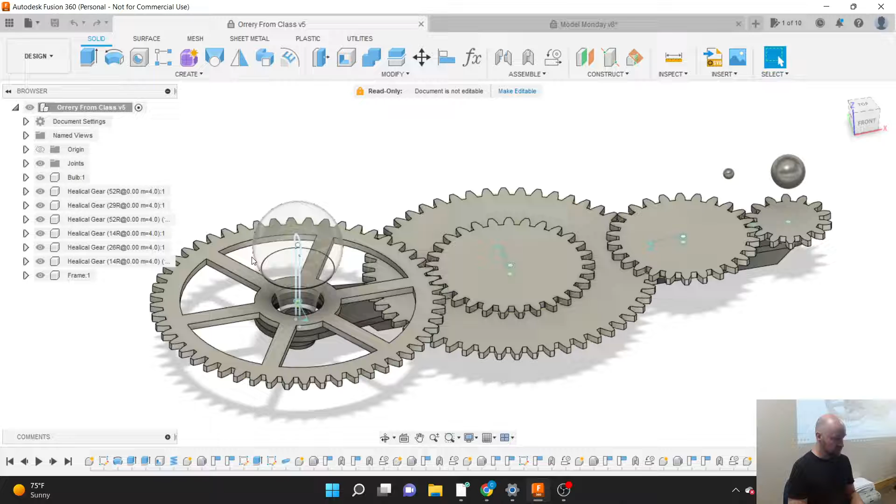So we are going to start by creating a new component. So up in the Create menu, I'm going to go ahead and find the New Component option there. So a component, as you may know, is a collection of sketches and bodies and construction planes, all housed in kind of a neat little folder or component, as we know in Fusion. And we're going to call this our base, because it is all about the base. All right, so I'm making a new component.

My active component is my main document component. So that means when I make this new component, it's going to make this inside of my main document component. You can see I can spin this little triangle here on my browser and hide or show all my components that are inside my main document component there. And I'm just going to go ahead and say OK.

So everything ghosted out. Everything became mostly transparent. And that's because it only shows us the things that are in our active component. So this little radio button here next to our component that we just made lets us know that this is our active component and nothing exists inside of it right now. It is totally blank. So inside of this component, we're going to create a sketch.

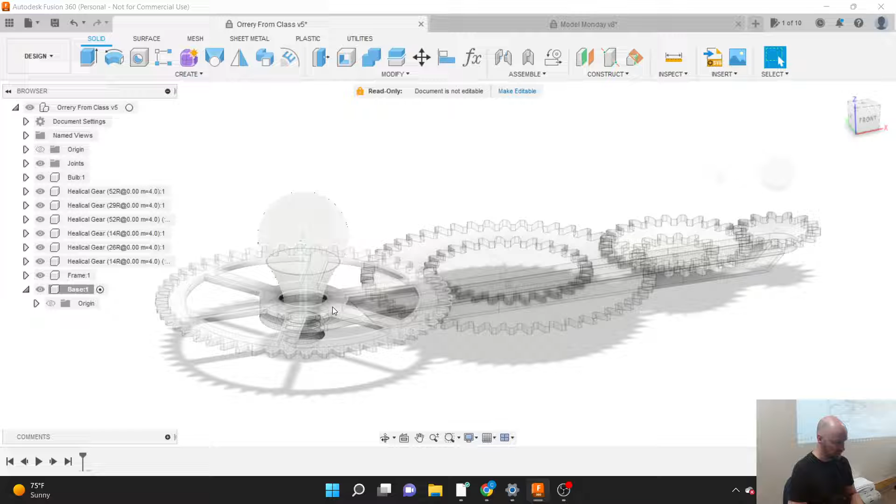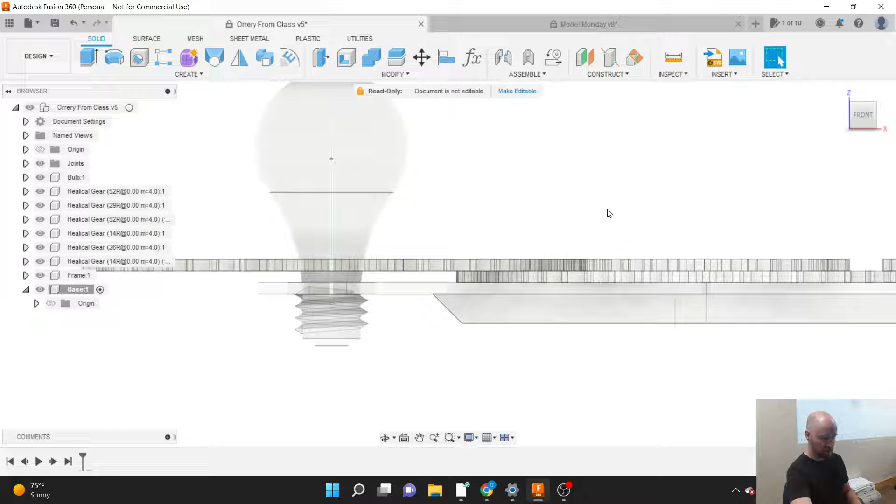I am going to choose to make this sketch on an existing plane here, on a surface that we already have in our model. I think that's how I'm going to do this. I'm just letting my brain think for a minute, because, yeah, I'm actually going to make it on top of the gear. That's the way this goes.

Okay, so from the Create menu, I'm going to go ahead and choose the Create Sketch icon here. So in general, we start by making two-dimensional sketches, and then we make those two-dimensional sketches three-dimensional. The first thing that we're going to do here when we're making a sketch is we've got these three surfaces that it encourages us to create that sketch on. So we've got to start with a two-dimensional surface, or tell our three-dimensional drawing environment where you're going to draw that two-dimensional sketch. Kane, for you, you can pick any one of these three surfaces. That will totally be fine.

But for the rest of us, we want to draw on the top surface of our innermost gear, that 52-tooth gear that is surrounding our light bulb. And my trick is I just kind of hover around the model. Everything is kind of ghosted out, but if you hover over the right spots, you can tell what surface you're highlighting. Because in addition to those three drawing surfaces, you can create a sketch on any flat surface.

So I'm going to pick the top of this gear as my drawing surface, and I'll just spin around to look right down at that. Yeah, indeed, I'm on the top. And thankfully, it put the origin right at the middle of my gear here.

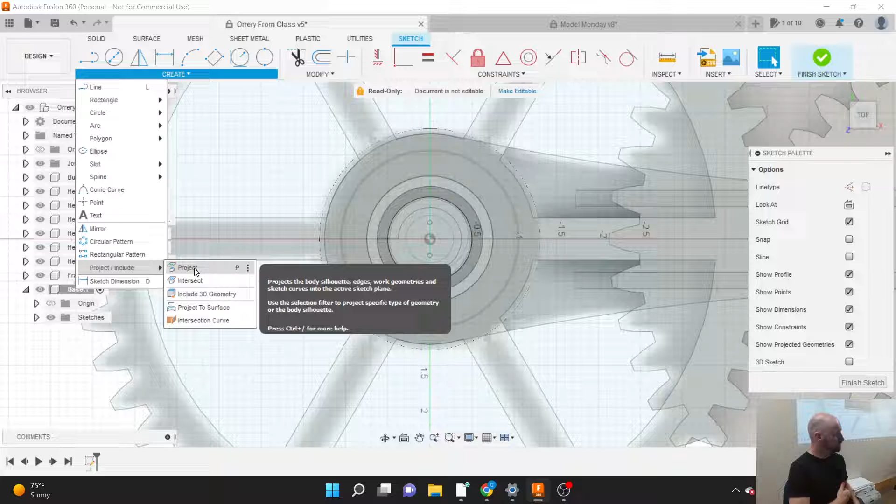All right. So we're going to project over just any one of these circles that I can get to highlight that is concentric. So we have a lot of concentric circles here, from our light bulb to our 52-tooth gear to the frame underneath it. I just need one of those circles to project over, and then I'm going to go ahead and say OK.

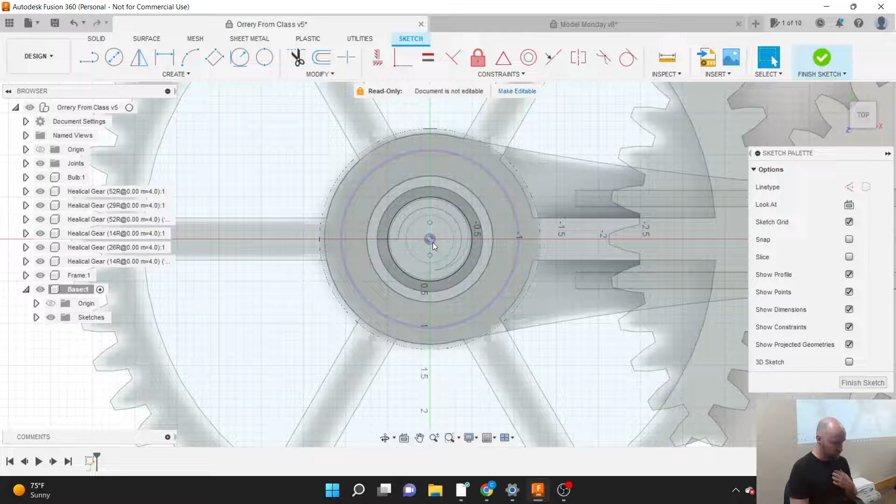So now I know I have a center point there that I can use as a common point here, because now I'm going to make a circle. So from our Create menu, I'm going to go ahead and choose the circle option, and then the center diameter circle option.

And I'm going to choose to make a center diameter circle of a size that I totally remember, because I was not frantically building an airplane just before class today. I want to say this is two.

Would you like a digital caliper? Yeah, if you have, or that'll work too. That'll work just fine. Yeah, thank you. This will be just fine.

Yes, it is 1 7/8. And that sounds right. As you may know here in Fusion, you can type in measurements in a lot of different ways. So if I want to type in 1 7/8 of an inch, I can do that. I can also type in 1.875, which is 1 7/8, I believe. And that is a totally fine way to do that as well. So 1 7/8 is the second circle that we're going to make.

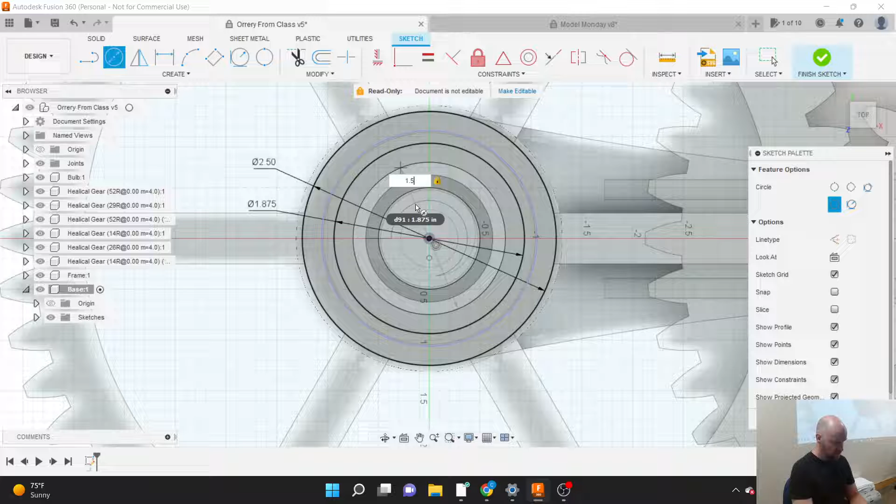And then the last circle that we are going to make is going to be the smallest circle, and that is 1.5 inches. So we're going to make one last circle, also concentric with the other 2 circles. That is 1.5 inches. And I'm just going to neaten up my measurements here.

People know I like to try to keep my drawings organized. We've been doing a pretty good job of organization here with this project, so try to keep up that winning streak. All right, cool. So now I'm going to go ahead and say finish sketch.

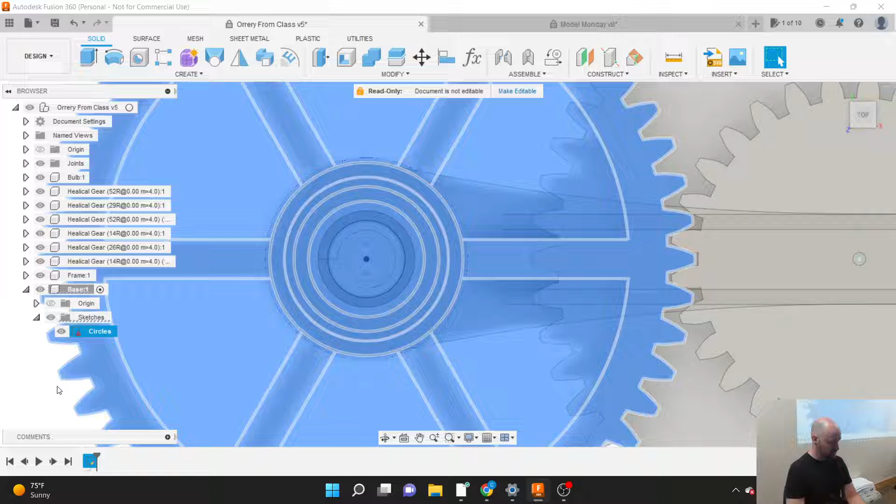So now we've got a sketches folder here inside of our base component. And if I turn the little triangle next to that sketches folder, there's a sketch here that I can name. So I'm just going to click one time, pause, and then click a second time. And now I can rename that to circles, or base, or profile. There's probably any number of names that you could go with, but anything is better than sketch 1. I think it's also going to be the only sketch we need to make for this, which is convenient.

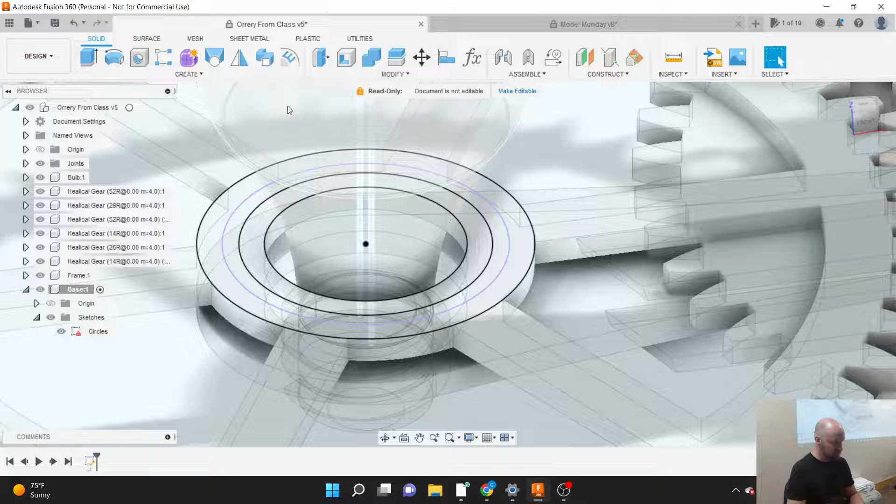All right, so now we can extrude some bits. So let's go ahead and start by extruding. I clicked finish sketch, and I'm going to come up to my create menu, and I'm going to choose the extrude option here.

And I'm going to extrude. For me I have to click on 3 different things, but I think that's because I've got that projected circle in there. Let me just verify that one of those lines is purple. Yeah, so there I get a little purple line in there. I'm curious. I wonder if you can make a projected line into a construction line? Let's do an experiment. Look at that, you can. So that's kind of fun.

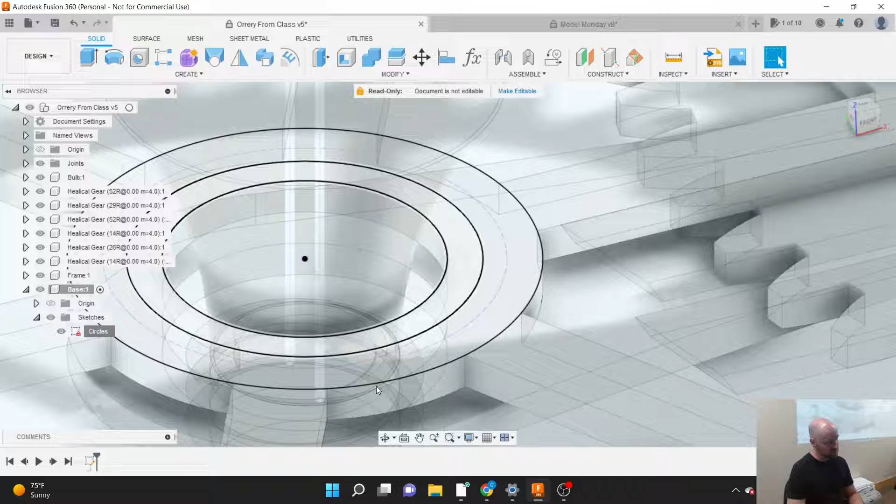So here's what I did. I guess I didn't really need to, but I had that projected circle that I had made, and a solid line. Maybe I should change it back so I can demonstrate for everybody. A solid line divides up a surface here. So this is my projected line that I just used to find the center point here of the solar system, and the center of the sun is right there.

In case you're looking for it in your flat Earth world, it's right here.

And so that projected line just divides up that, and it makes it a little bit confusing. Sometimes I'm like, oh, am I supposed to be picking this one and this one? And maybe I wouldn't get the right things to extrude because there's a lot going on there.

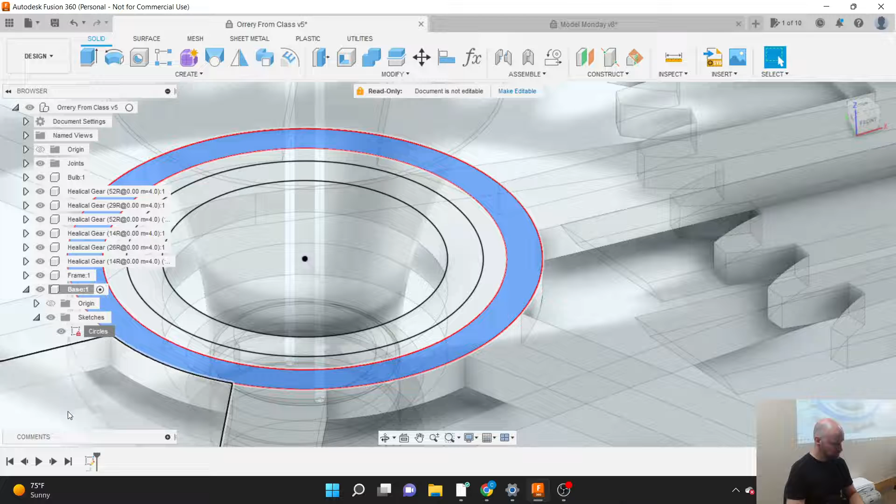But if we right click on the sketch that we just made, so either here in the sketches folder in our browser, you can right click and you can say edit sketch, or down here in our timeline, so down at the bottom of Fusion 360, we've got this kind of timeline of events, and I can right click on that sketch icon in the timeline and say edit sketch.

And now if I highlight the purple line that I'm projected over from existing geometry, and I push the construction button here in my sketch palette next to where it says line type, it'll change that line to a dashed line. So now that that line is a dashed line, if I click finish sketch,

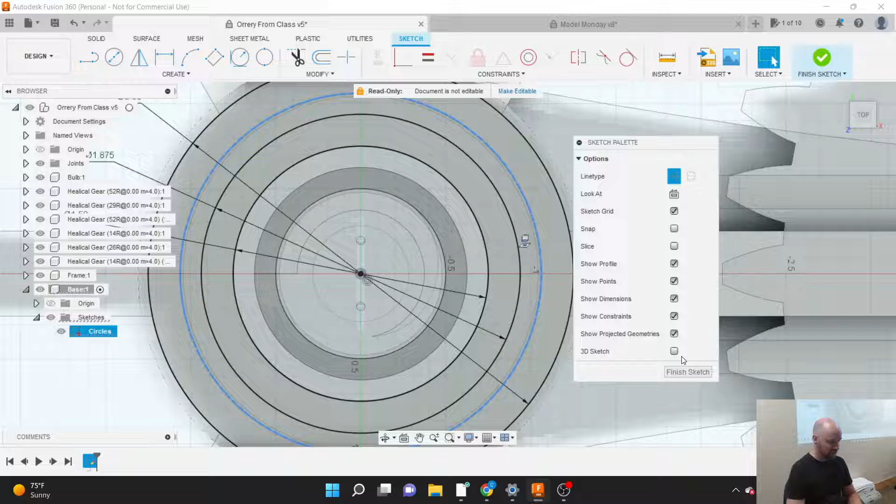now when I come to do this extrusion here, that dashed line isn't going to divide my surface up, so I won't accidentally confuse myself here about which things I need to extrude. But we do indeed want to extrude.

I digressed a little bit there, so Fusion 360 is full of tangents and lines that they are tangent to.

So we are going to extrude up that little ring. I believe it goes up 1/4 of an inch, because that's the way my brain works, is I think using the imperial measurement system, which is like the other measurement systems except worse in most ways.

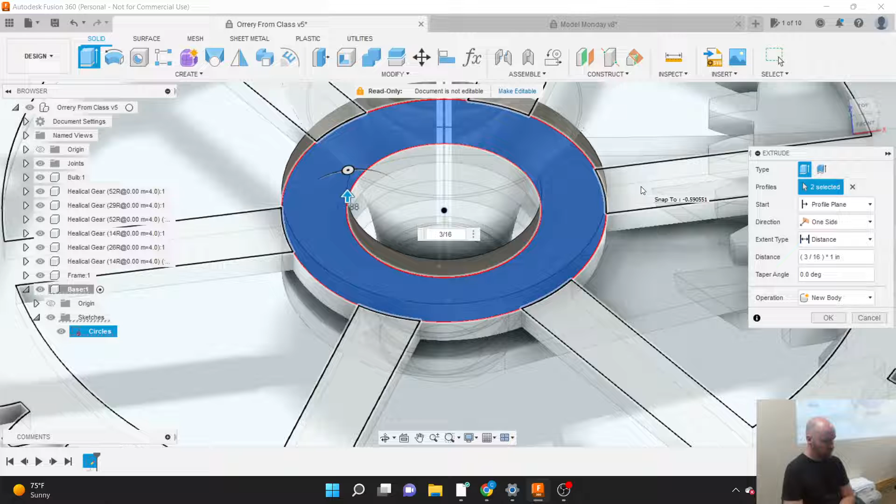Nope, I lied. It is 3/16 of an inch. Although I suppose there's no reason it couldn't be 1/4 of an inch, but why not make it the exact same as the one I have? Not 3/32, 3/16. So 3/16 of an inch is our distance.

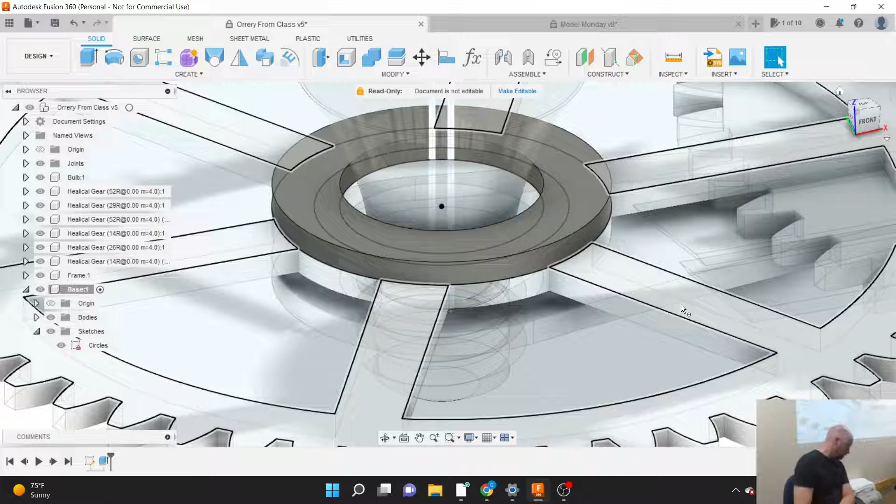We're making a new body here, and I'm extruding this up. So I'm going up away from the surface of my gear here. And I'm going to say okay. All right, now I want to do another extrusion here.

I want to extrude out just the intersection of those concentric circles that I made. But right now it's difficult for me to do this because there's a lot of other existing geometry that's just kind of in the way. It's kind of hard for me to highlight the circle that I need to.

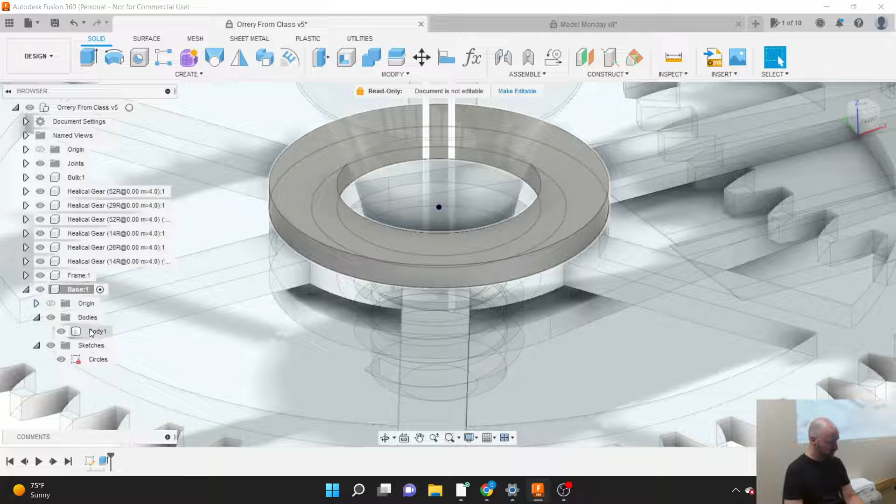So what I'm going to do is first I'll spin down the triangle next to my bodies folder. Now that we've created a three-dimensional object, we've got a bodies folder, we've got a body to name. This body is going to be the base. This will eventually become the base once we join things to it. So I'm just going to go ahead and name that the base.

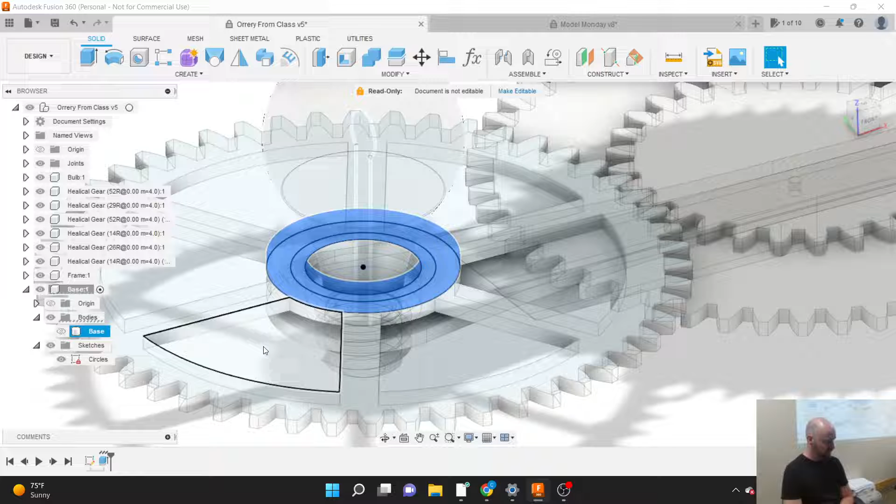And then I'm going to toggle off the visibility on that base. So once I turn off the visibility on the base, it's easier for me to highlight the sketches that kind of exist on the other side of that three-dimensional object there. And I can extrude out yet again. So from the Create menu, I'll go ahead and choose the Extrude option. I'm going to highlight that very middle circle there.

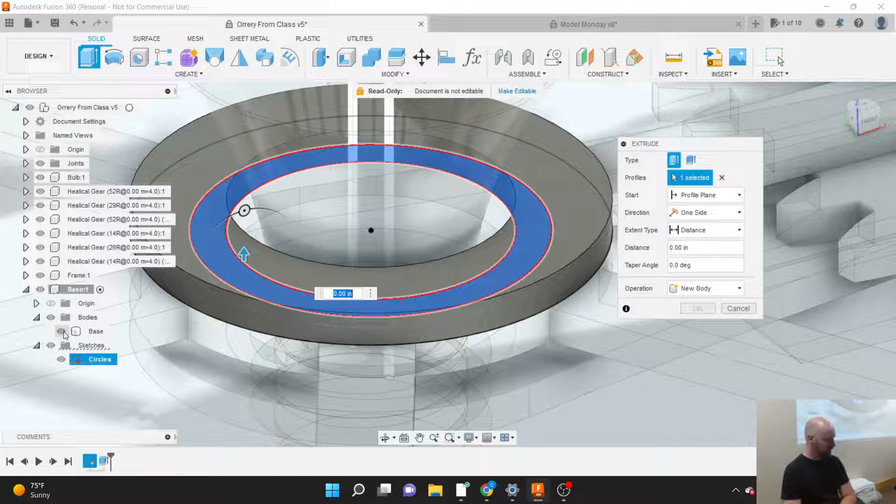Normally, or the standard way for us to extrude, and I'll tell you what, once we have the profile selected here, we can turn back on our base body if we want to. So it's just the selecting of the body that makes it difficult, and why it's handy to be able to turn off the visibility on that. But you can turn it back on afterwards. And we're going to go up a distance of 1/2 of an inch.

We're not going to do a cut operation here. The default here is changing to cut because we are extruding through an existing three-dimensional shape. So it defaults to cutting away from that existing three-dimensional shape. We actually want to join to that three-dimensional shape. So we're going to join to that ring that we made down below here.

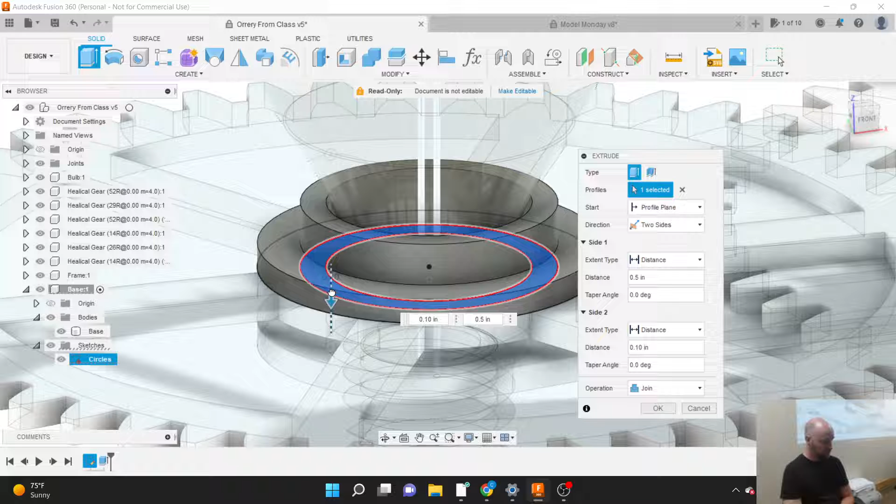And I'm going to extrude up a distance of 1/2 an inch, but I also want to extrude down a distance. So instead of my direction here in my extrude window set to one side, I'm going to change that to 2 sides. And now this number I remember because I believe it was 4 inches.

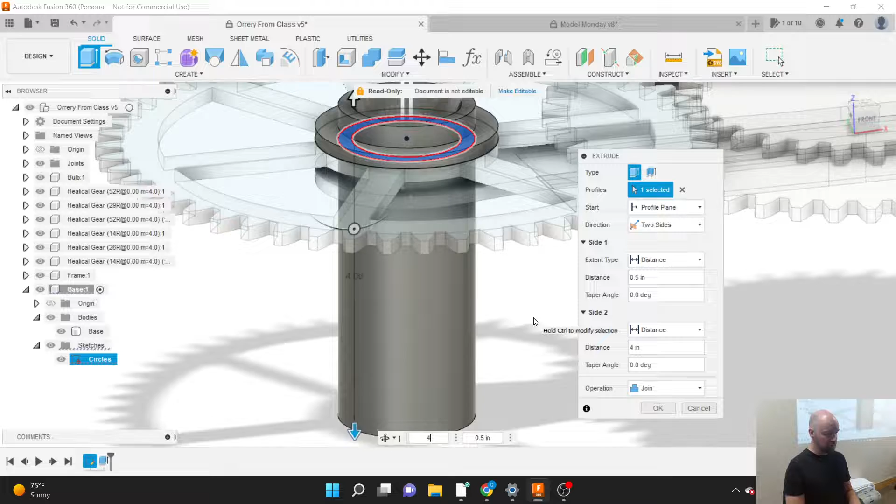Yeah, so we're going to go down from there. Yep. 4 inches. This has to be really long because the light bulb sockets that I found on Amazon just are really long. So you gotta have room for our light bulb to stick out there. So that's why this is such a long base here.

It also occurred to me that we might be able to expand this later with adding another planet around the outside at some point. So food for thought. All right, but we are joining these items together. We're making a nice long piece. We're joining it to our base, and I'm just going to go ahead and say okay.

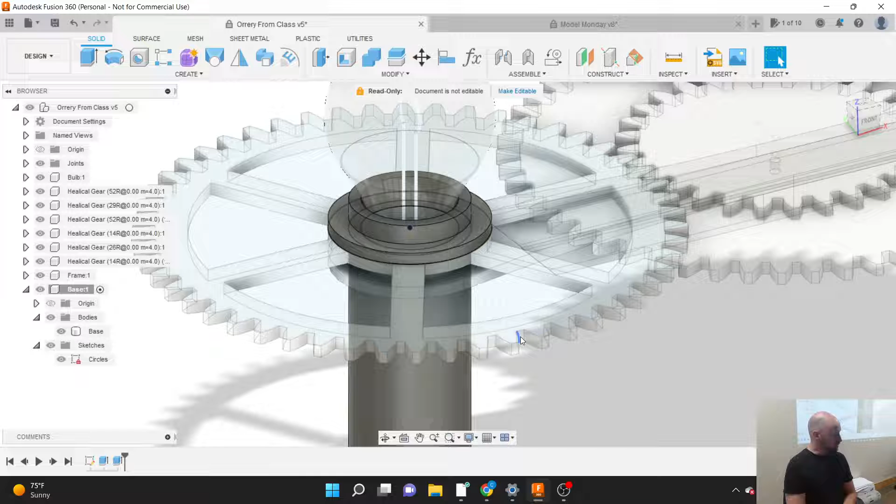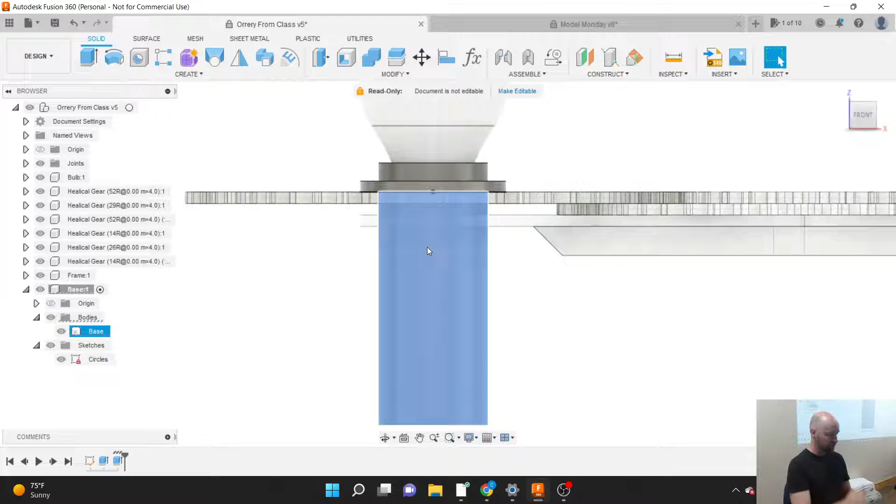So let's do one final extrusion, and that final extrusion is going to be for, for lack of a better word, the nut. So eventually, this cylinder is going to get a big, huge threaded profile on it, and then to clamp down, to hold our piece on there, we're going to have like a nut that threads all the way on there. So let's go ahead and make that nut right now.

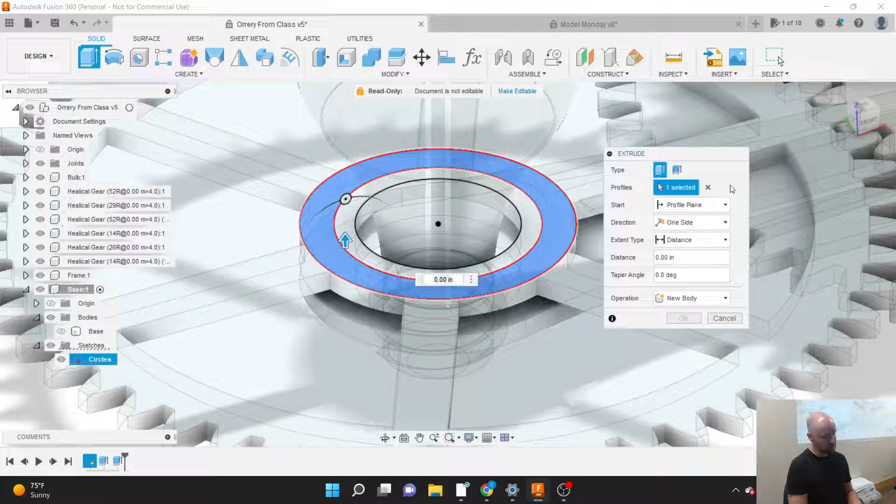I'm going to do that by turning off the visibility on my base, so it's easier for us to highlight the right sketch profile here. I'm going to go ahead and from the Create menu choose the Extrude option. And I'm going to pick the very outer ring there. Now, instead of extruding this, we're getting all sorts of tips for the Extrude menu here.

So normally when we extrude from the profile plane. So like if I go up, make it 3/16, just like the upper one. Are they the same? Close enough. Yeah. So normally it extrudes from the profile plane, right? But in this case, I want to extrude that nut and just have it live down below here. So instead of extruding from the start, that is the start of my extrusion being the profile plane, I'm going to change that to an offset.

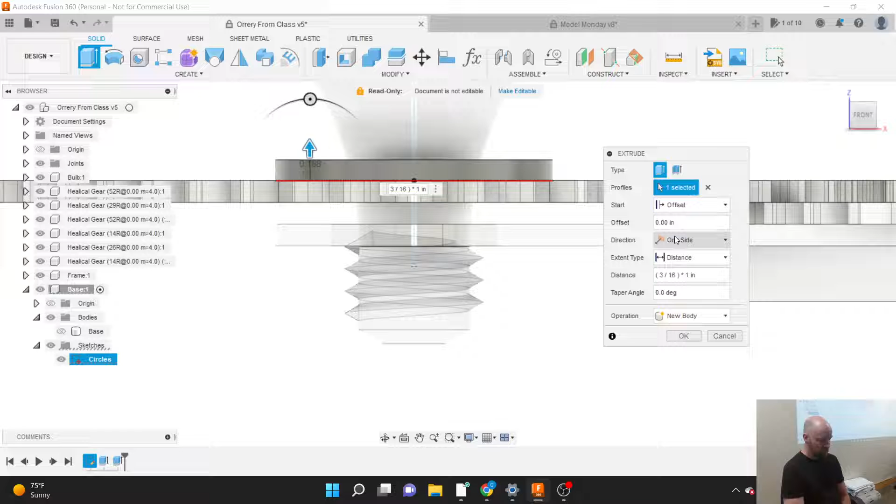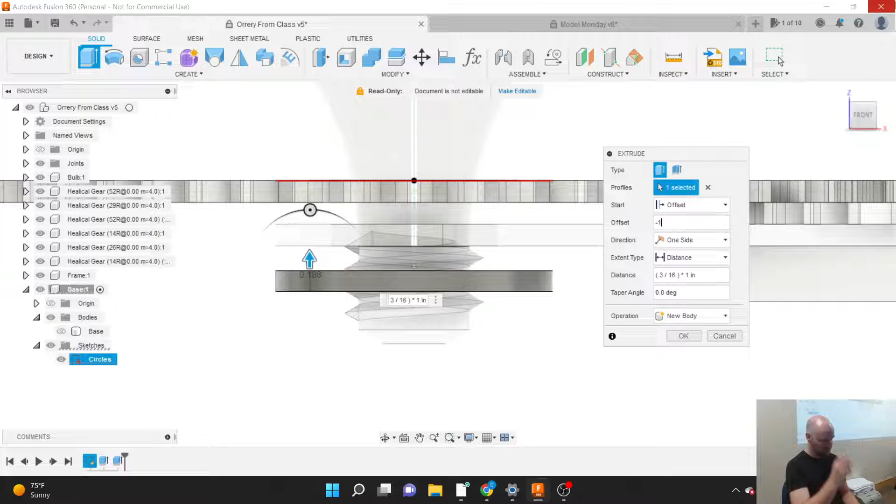And that offset, I'm just going to make like -1 inch, just so it's down there. It doesn't need to be anywhere in particular down there. When you screw it all together in meat space, it will need to be in a particular area, but it'll all be threaded and you can just put it wherever you want to. So I just want it to exist down below my gears somewhere.

I'm making this a new body, since we don't have our base turned on. Now if I turn on my base, the default will change to join, because it says, oh, this object directly touches another object, so let's go ahead and join those together for you. If you do have your base body turned on, just make sure that instead of join in the operation, you're set to new body there.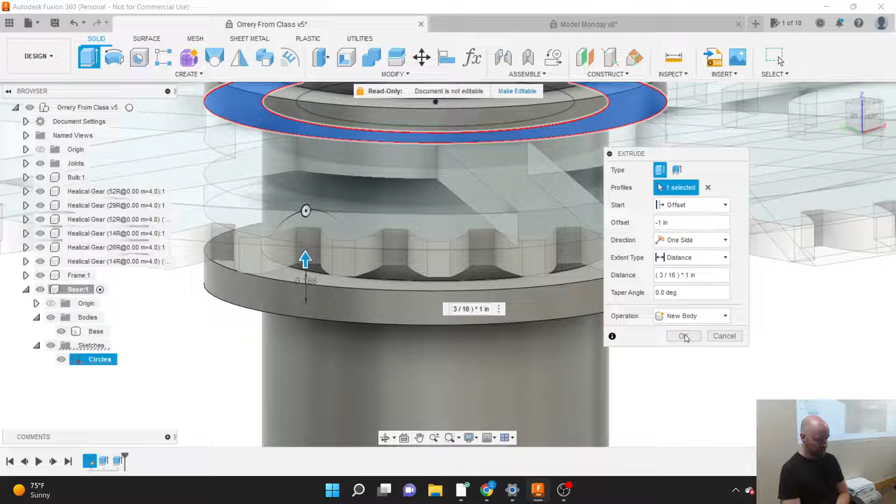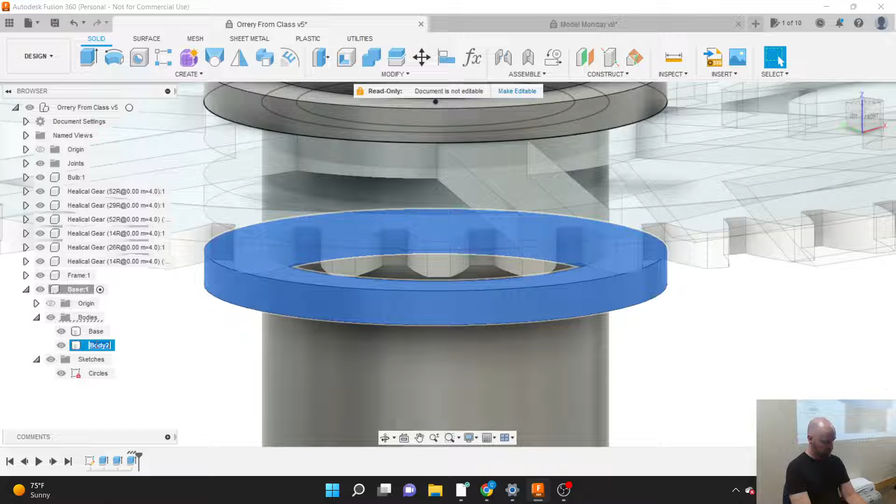Cool. And then I'm going to go ahead and click on OK. What was the amount? 3/16. 3/16. Yeah. Okay. So now I've got a body to name in my bodies folder here. I'm going to call it the nut, or screw clamp, or ring. I guess you could call it the ring also, but anything is better than Body 2.

And now I'm going to turn off my sketch just so it gets out of the way, because I actually don't think I need to use it anymore. Famous last words. Yeah, I don't think I need to use it anymore.

Cool. So the next thing, how are we doing so far? Everybody good at home? We're good here? Keeping up-ish? Yeah. Kind of following along? Okay, good. And we're good at home? Thumbs up at home? Cool, cool, cool. All right, good deal. All right.

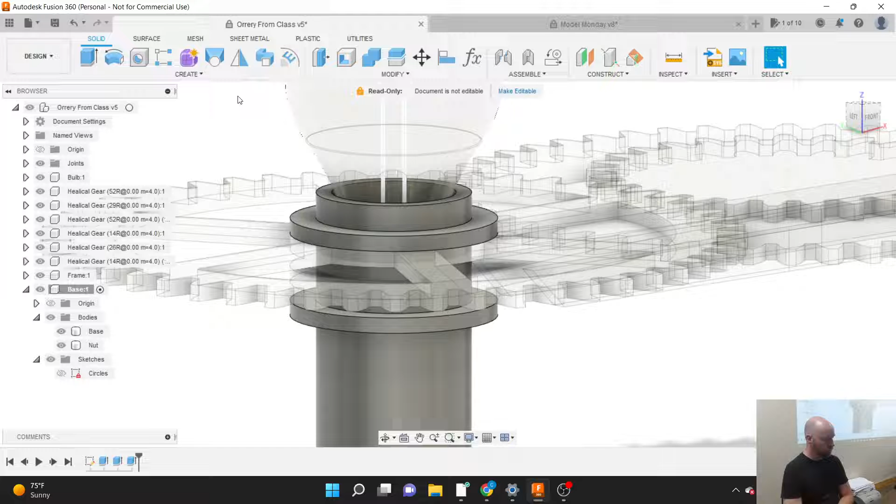So we're going to go ahead and add our threading to this big, huge structure here. From the Create menu, threads are really easy to add. So if I come up and choose Create and then the Thread option, we get our handy dandy thread window that pops up. I'm going to do something real quick. Sometimes if I mess with my settings, my contrast comes back. That might be a little better.

Alright, so I'm going to choose the face that I'm going to select here. And for me, the first face I'm going to choose is this big, huge 4-inch section there. You can see that it defaulted to a thread size, and it just made it whatever standard thread size was close-ish to the current diameter of that cylinder. And 1 7/8 is a fine thread size for us.

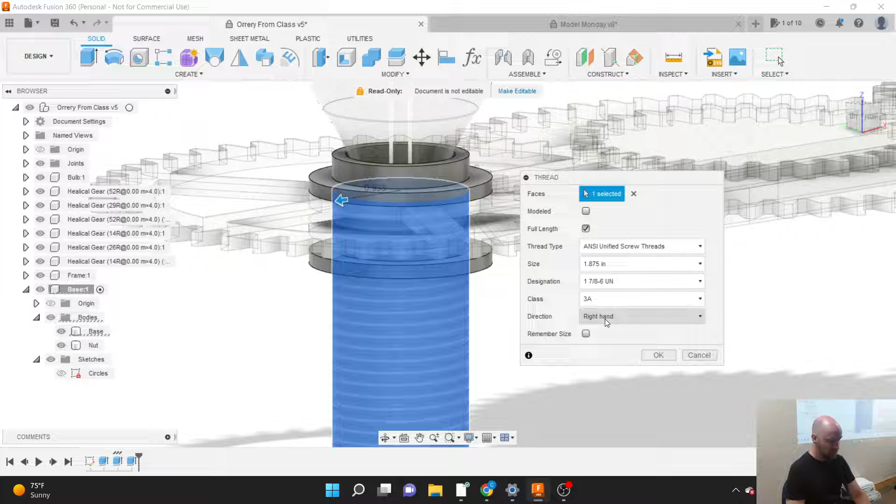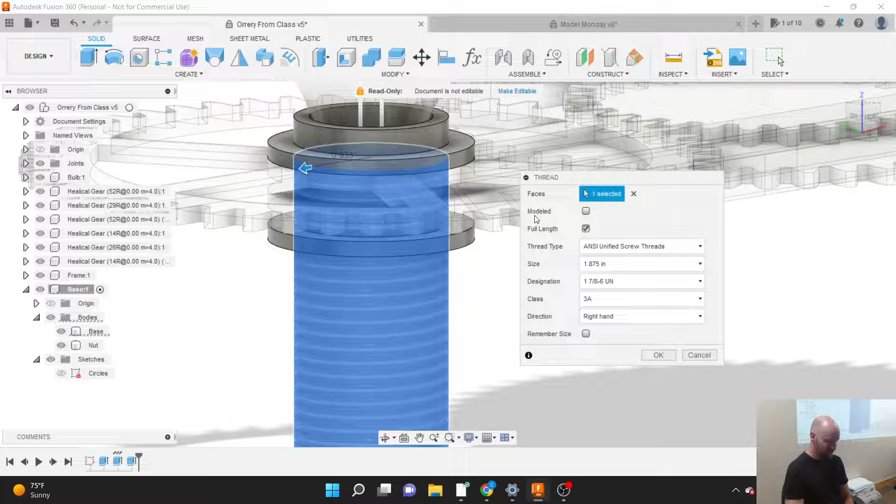It will be phenomenally adequate. But we do want to make sure we hit the little modeled checkbox. That checkbox is what allows it to be printed when we go and print this. If it's not checked, it's just kind of like the impression of a thread. It's not actually a three-dimensional thread that's in there.

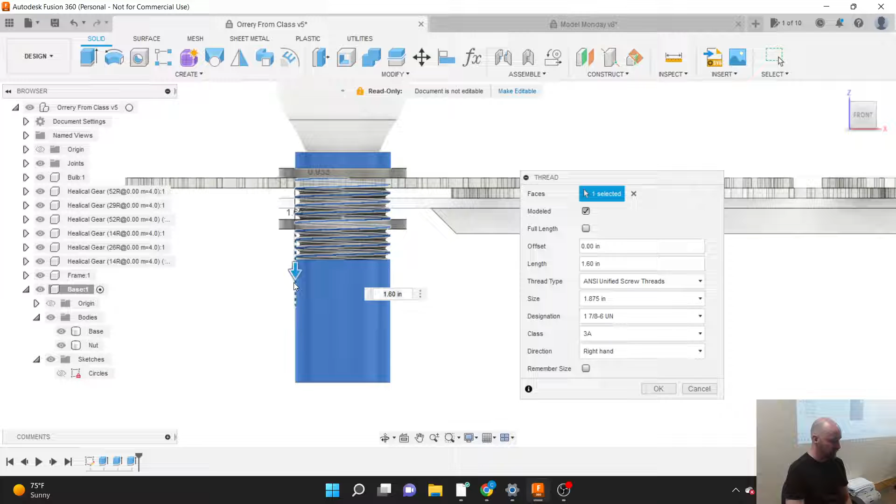We don't need to make this a full length thread. So the little checkbox that says full length here, I'm going to uncheck that. And now we have a whole bunch of arrows here. We've got 2 arrows that move up and down. So one is the location of the bottom of the thread. Now the bottom of the thread needs to go all the way to the bottom, because we need to be able to get our nut on from the bottom.

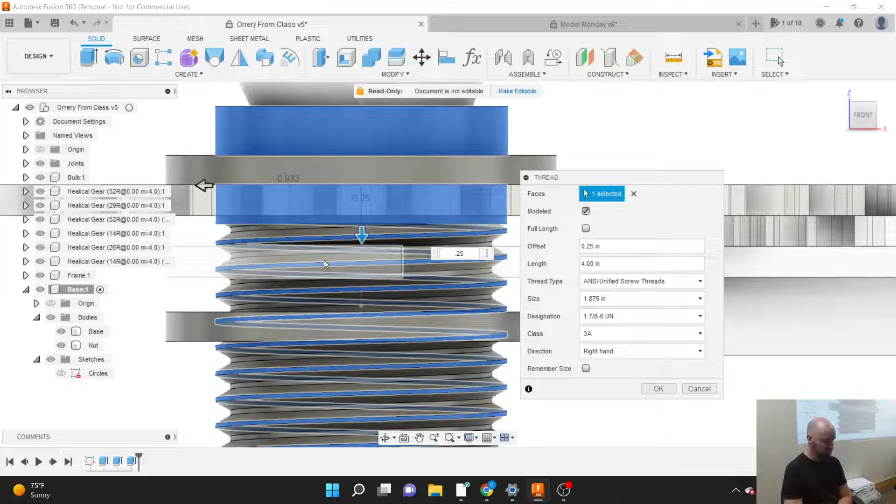However, the top of the thread doesn't need to go all the way to the top. So we can have like a 1/4 of an inch gap or so at the top of our piece, and that'll ensure that, actually it should be slightly more than a 1/4 of an inch. It should probably be more like 3/8. That when our gear and frame are rotating around here, it's got a nice surface to rotate on.

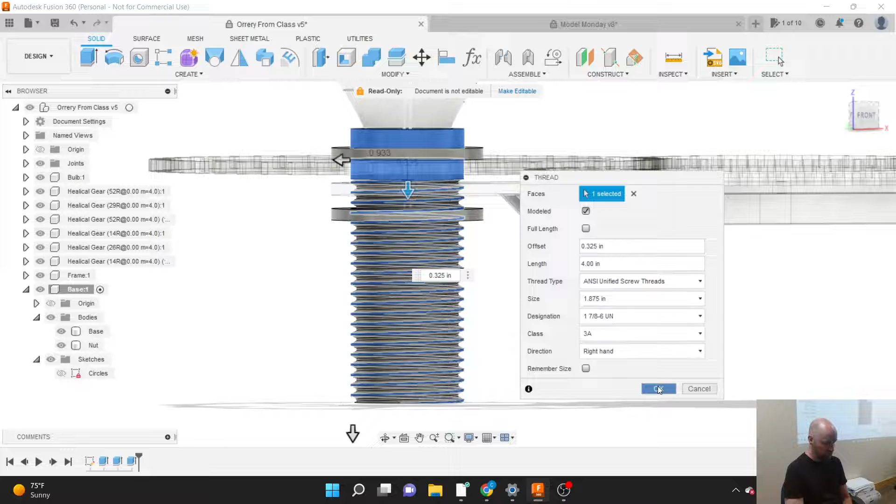You probably don't want it rotating directly on the threads, because they may not be perfectly concentric over the space of just a 1/4 of an inch. So I gave it a little flange there, I guess you could say, at the top, or a shoulder to rest on there. So 0.325 of an inch from the top goes all the way to the bottom. It's a 1 7/8 inch thread, and I'm going to go ahead and say OK. All right, that looks wonderful.

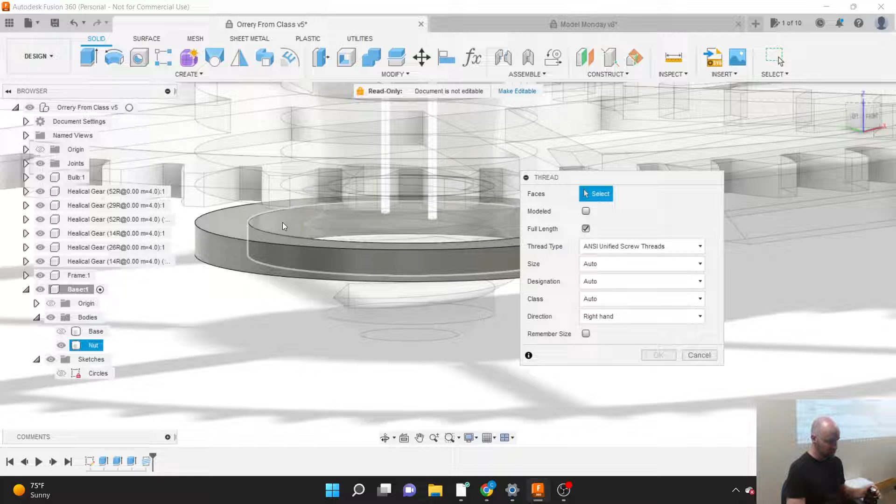Now we just need to thread our nut. So I'm going to do it the exact same way, except this time I'm going to turn off the visibility on my base body. So if I turn off the little eyeball next to my base body there, now it's easy for me to see that surface on the inside. So when I come up to my Create menu here, I can choose the thread option. And I can choose as the face that I'm going to thread that inner face from what I called my nut, could be called your ring.

I'm going to turn on the little modeled checkbox, and usually it defaults to whatever the last size you used was, but it's always a good idea to keep an eye on this thread size, like, oh, 1 7/8, that's definitely what I was going with before. Well, here there's a remember size checkbox. That's kind of interesting. I've never actually used that before, I'm not sure what that does. Use at your own risk. Remembering the size sounds like a good thing. Sometimes Fusion has really great tooltips if I just hover my mouse over something, but not in this case. Alright, so I'm going to click on OK.

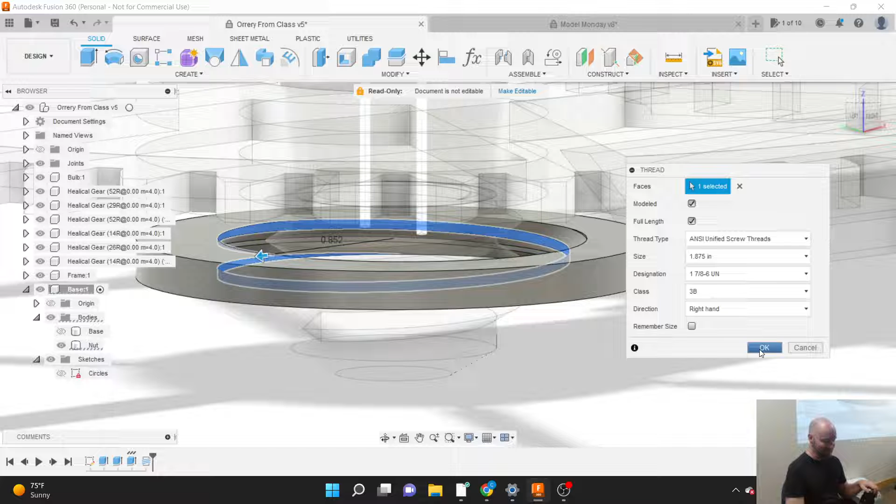Now we've got 2 threaded objects here. However, from experience, and Mike, you probably know this experience too, when you 3D print an object that needs to thread into another object, you need a little bit of,

you gotta have a little room for Jesus in there. So you slip your phone book in there and keep the kids from dancing too close together.

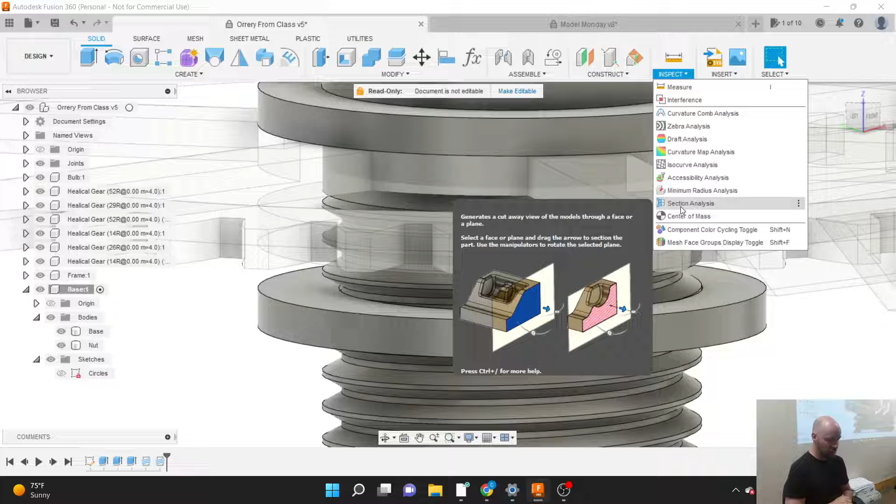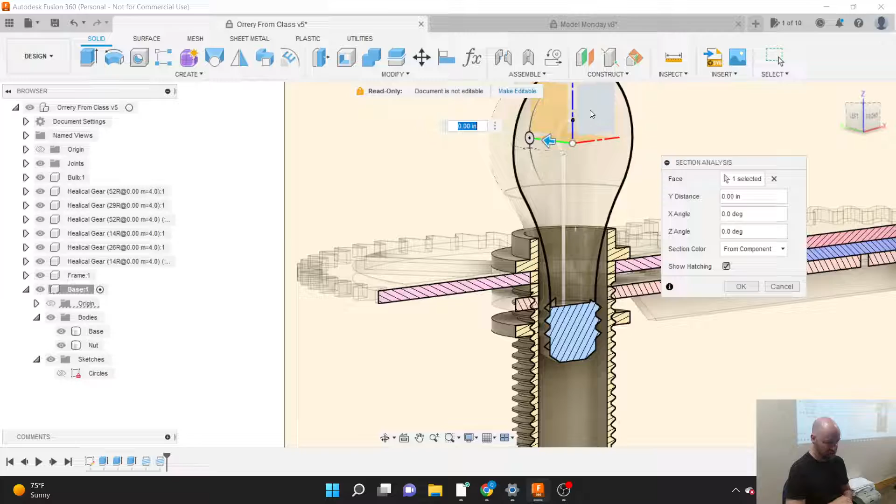But we're just gonna use the press-pull command instead. So let's see if we can illustrate this first. From our Inspect menu, choose this option called section analysis. What this section analysis tool will allow us to do is to choose a surface. So I'm going to pick one of these vertical surfaces that'll split my cylinder in half. It says, pick a face. So if I choose that face right there, you can see that it's given us a cut in half view of our model here, right? So I'm going to say OK.

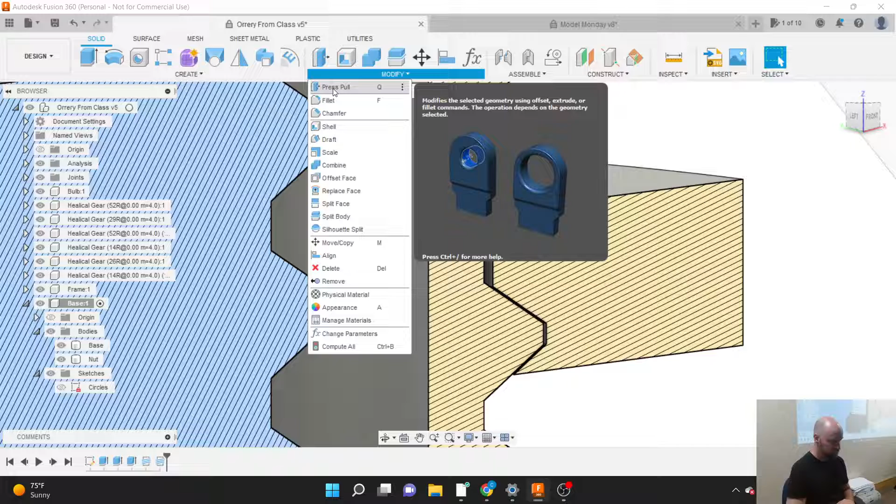And I'm going to zoom in here, and you can see there's not a whole lot of space in there for those threads. There's not a lot of tolerance in there. You need a little bit more tolerance in a 3D printed thread than you would a machined one. So let's add that little bit of tolerance now. The way that I choose to do this is from the Modify menu, I choose Press-Pull. And then I'm going to zoom in, and it doesn't really matter which side you choose to do. So I'm going to choose to do this all on the nut side.

So I'm going to highlight a face on my nut that represents kind of like that shelf. And then I'm also going to highlight a face on my nut that is the outside. So I've got the top and bottom of that thread profile in there. And now if I offset it by a negative 0.01, which in machinist world is a country mile, but in 3D printing world is, on my printer, just right. So negative 0.01 inches, a 100th of an inch.

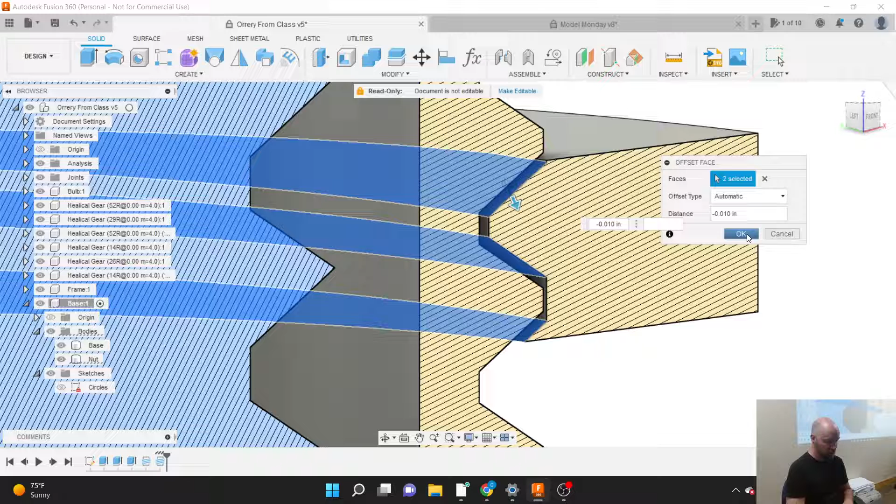And then I'm going to go ahead and say OK. And now I'm going to do that one more time. So from the Modify menu, I'm going to go ahead and choose the Press Pull option again. And this time I'm going to choose the ring that is just like that straight up and down vertical part of my thread profile here.

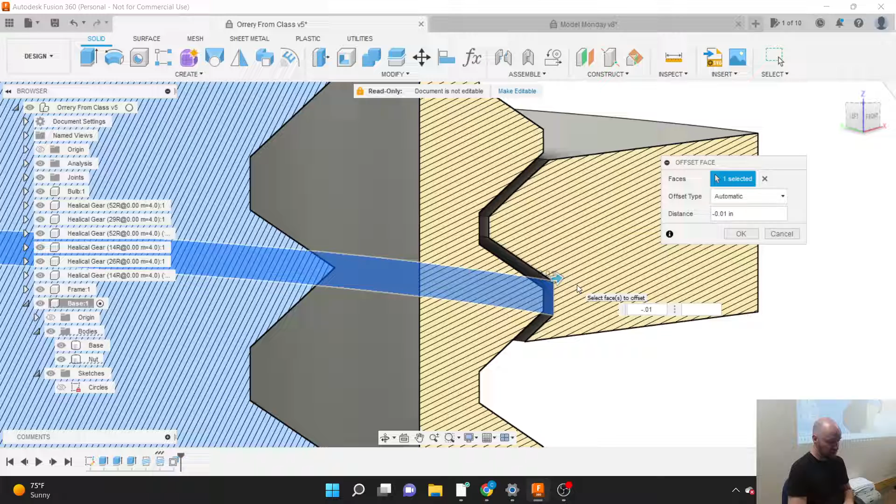And same deal, negative 0.01 inches, approximately 1 country mile. And that'll just give it enough room. Actually, does that thread? Yeah, that makes sense. And then I'm going to say OK. So you can come and check out this thread here and see that it's still pretty tight. But it's got to be able to thread on there. Otherwise, it doesn't count as a thread if it doesn't thread together.

So, cool. We have a section analysis folder here that for some reason it has made in my main document component. So it's not inside of my base component. I'm not sure why it does that. I would imagine it would have made it in the component, but I am going to name this analysis. So this is my thread close-up. Just so there's something labeled there.

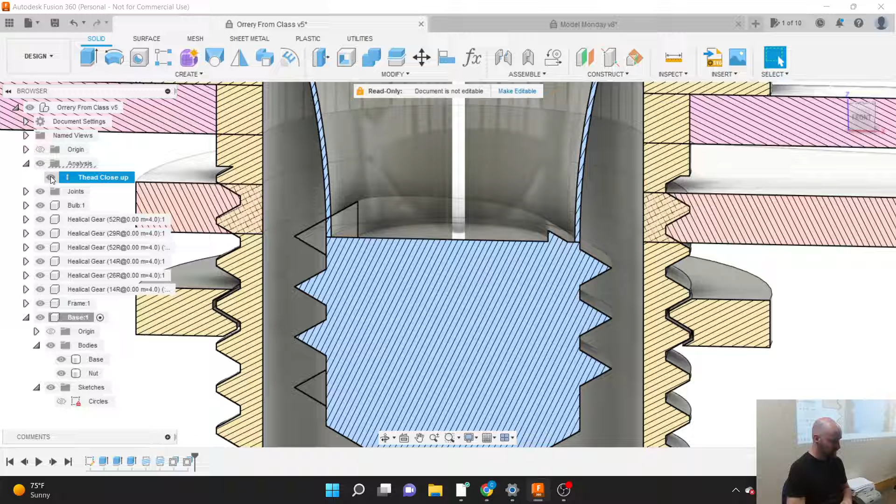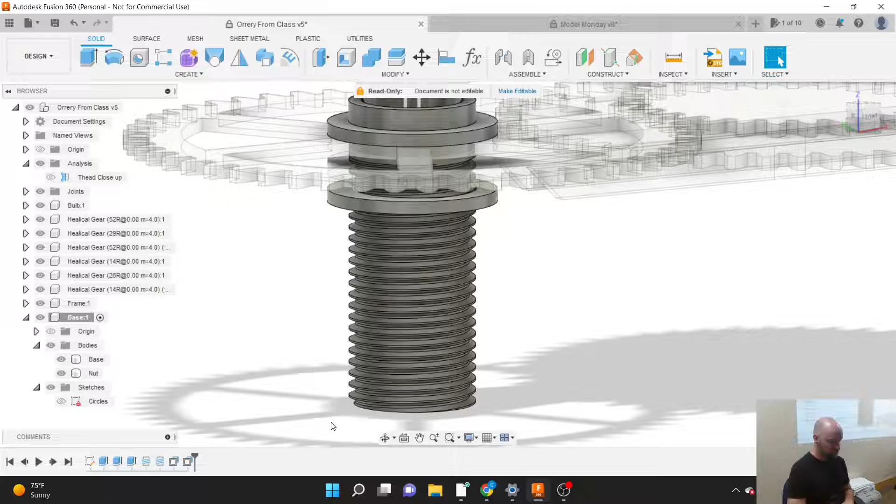So we know what exactly we were analyzing when we turned on that analysis, because now what I'm going to do is turn it off, because I actually don't need to look at it anymore. I just wanted to visualize the inside of my thread so I can do the right tolerance there. Alright, cool. So that is our base form here. Now let's go ahead and make, I think we have time to do our mounting mechanism for our Earth and our Moon.

So I'm going to go ahead and make my main document component my active component again. And I'm just going to click on my moon because I don't remember where I put it. So while we were keeping things organized, it looks like I put both my moon and my Earth inside of my last gear. And the way that I can tell is when I click on the body, I see a little highlighted blue dashed line on this component right here. So let me unhighlight it, and then if I click on it, you can see that little blue dashed line

appears right down there. So if you're not sure what component you've got a body in, just click on the body, it'll highlight what component that's in, and then you can spin down the little triangle and see that the bodies folder has the little dashed line underneath it. So I can spin that down, and look at that, I've got a body here called Earth, a body called Body 1, which I'm going to call the gear, and a body called the Moon.

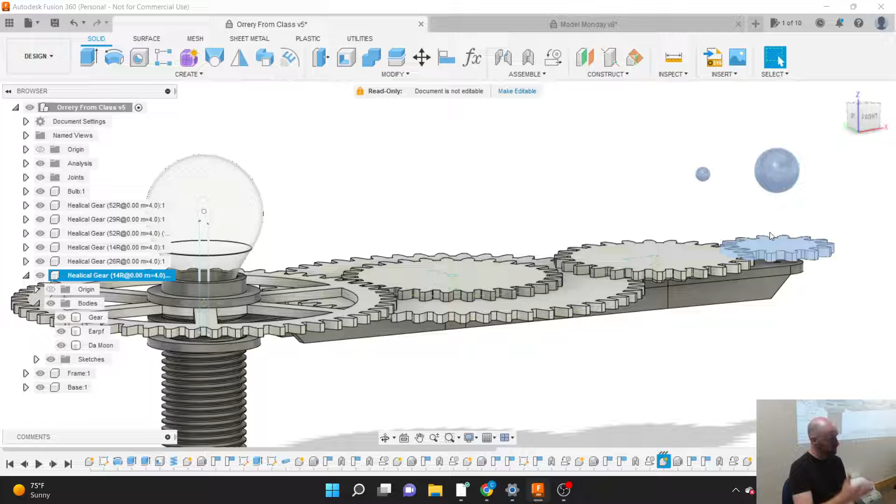So now that I know what component all that stuff is in, I'd like to add my wire so they're not floating, because we abide by the laws of gravity in this class at all times, and if these orbs are just floating, they will fall. So we'll need to make that our active component so we can draw a wire connecting our gear to our Earth and to our Moon. So let's do the hard one first, the moon.

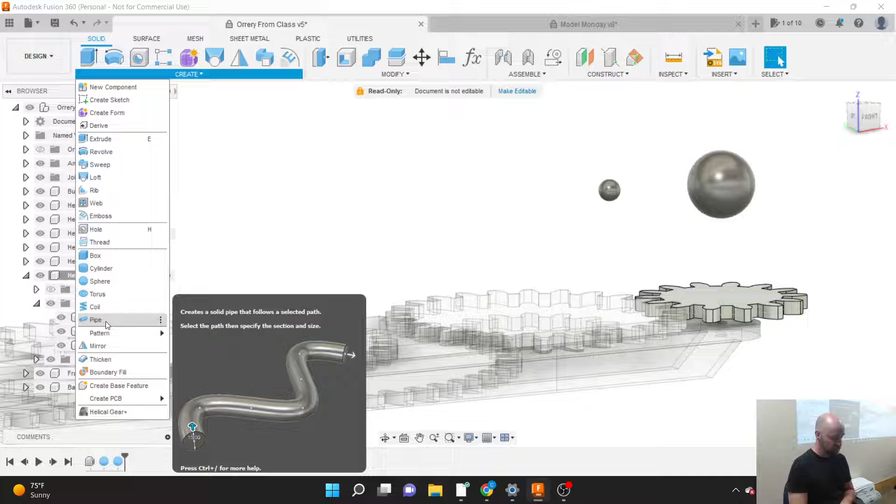The way that I'm going to choose to do this is to use the pipe command. Why? Because we don't do it very often, and the pipe command is pretty cool. The way this pipe tool works is it will create a pipe shape along any sketch path that you make for it. So I'm going to start by making the sketch path. From the create menu here, I'm going to choose to create a sketch.

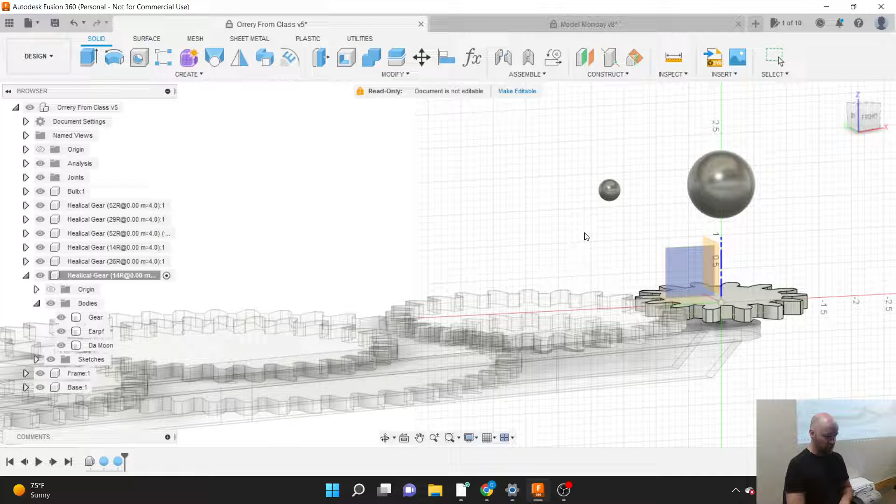Again, my 14 tooth helical gear is my active component. So that way when I make this sketch, I make it inside of the sketches folder, inside of my 14 tooth gear component here. And I'm going to pick, gosh, I really don't have a good plane here to pick.

So the way that I'm going to do this, I'm just debating in my head whether I want to talk about 3D sketching or not. Have we talked about 3D sketching at all in this class, Mike? Do you recall? I think on your money gun. Oh yeah, maybe you're right. You just kind of cursor through it, and as I recall, it kind of went overhead. Okay, cool. So let's give that a try here.

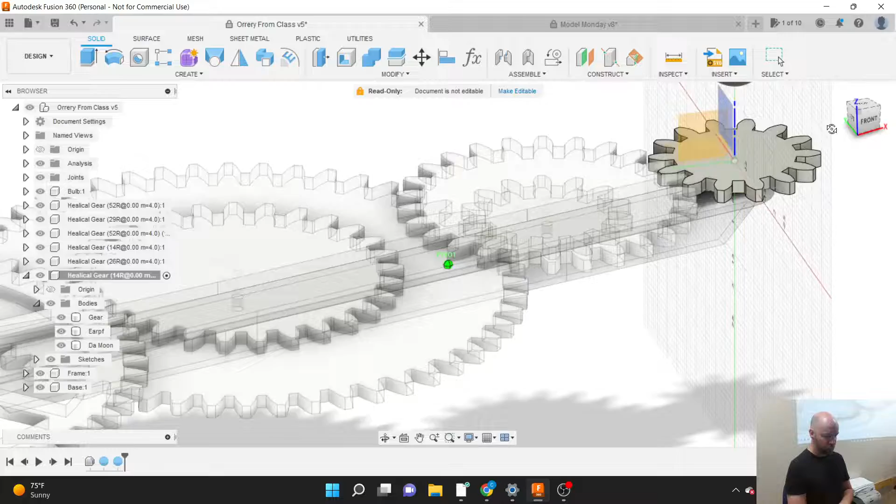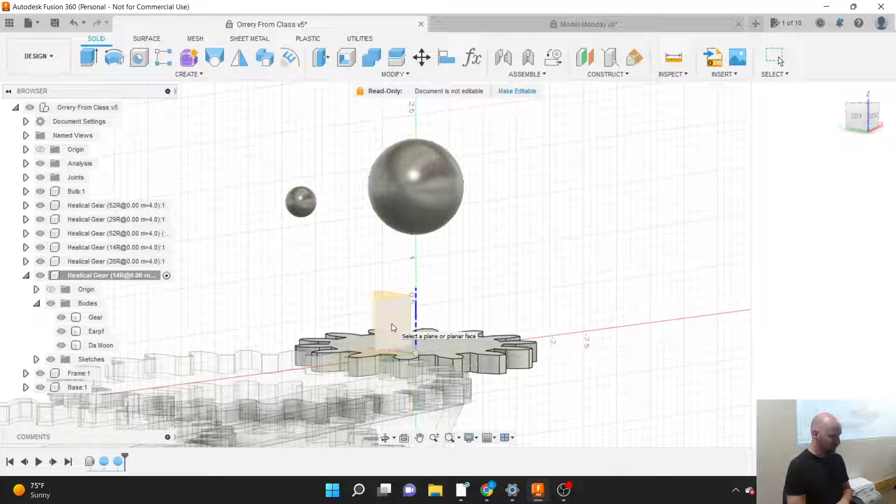So I'm going to choose to create a sketch. None of these planes really go through my moon. And in order to connect my moon to my gear, I really need a plane that goes through it, and I don't really have that. Now, I could mess around trying to make a plane from things in the construction menu here. But instead of doing that, I'm going to pick just one of these planes. Doesn't really matter a whole lot which plane you choose, because we are going to turn on something called 3D Sketch.

So in our Sketches palette here, in fact, tell you what, so normally when we make a sketch, we draw a line, and it would come up, and it would connect right to our Earth, right there. So, cool. That is the path that we could use to make a pipe that goes to our Earth here.

Now, if we want to make a pipe that goes to our moon, if I draw a line off of that first line that we made, like maybe at the halfway point here, because that makes sense, and I just draw a line over until I get close-ish to what looks like underneath my moon, and make a little stopping point there, and then I draw a line that goes up into our moon, or from this perspective, what looks like into our moon.

If I rotate my view, oh, look at that, it is in our moon. I picked a really bad plane to illustrate this, because mine goes right through there. Does your sketch go into your moon? Not really? Here, I'm gonna click finish because I could do a worse job of making that sketch, and that was kind of the point.

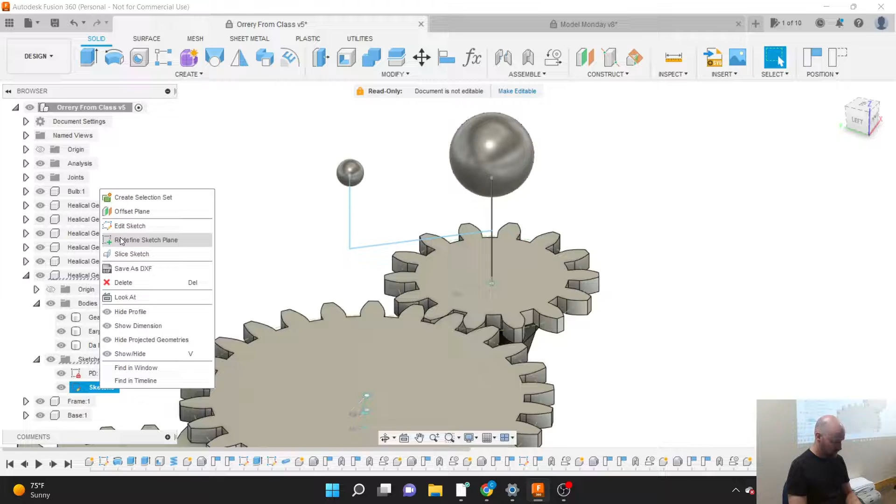So here, if I turn that on and I turn this joint, oh, the sketch is gonna rotate. That's a good thing, but not when you're trying to talk about three-dimensional sketching here. So I'm gonna do Command Z a couple of times, and I'm gonna get back to before I had made a sketch, and I'm gonna choose a worse plane to make that sketch on.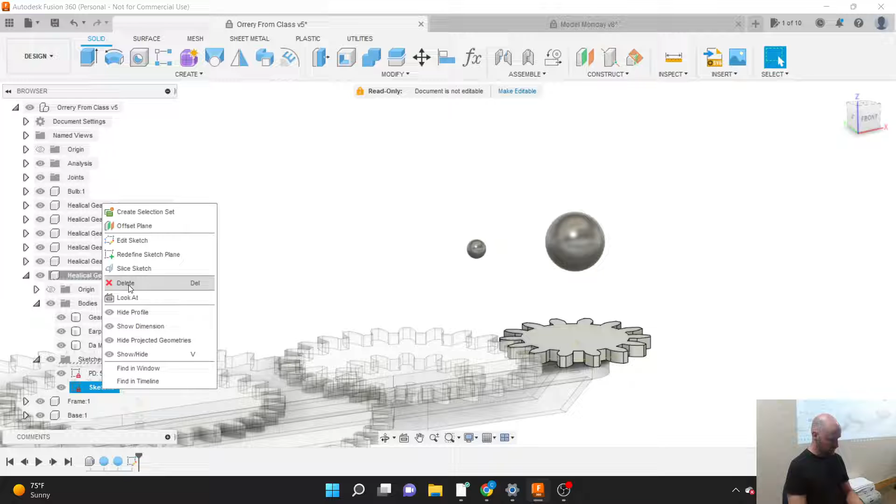Alright, so now I can say create sketch. Oh boy. Alright. Definitely pick a bad plane to make that sketch on. And now, just like before, I can start by making a line that goes right up to my Earth. Right, so I've got a line that will be an adequate path to make my pipe on that connects my Earth to my gear.

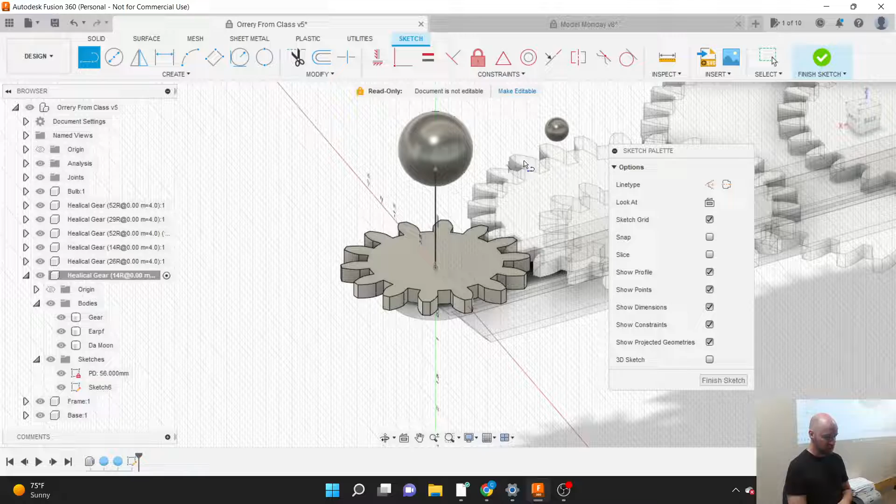However, it is impossible to draw a line on this plane that connects my moon to this Earth here, and that's because they don't exist on the same plane. The way that you can draw out in the middle of nowhere, not on a two-dimensional surface, is if you turn on the little 3D sketch checkbox. So I'm going to turn on that 3D sketch checkbox at the bottom of my sketch palette here.

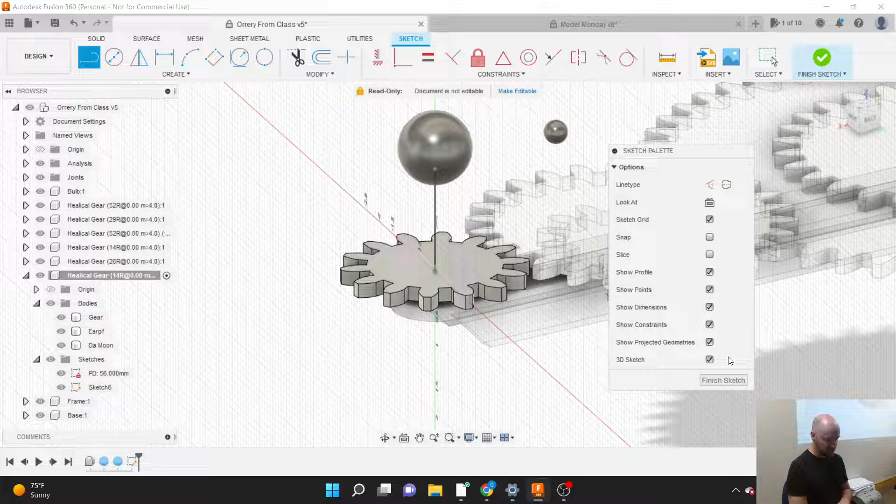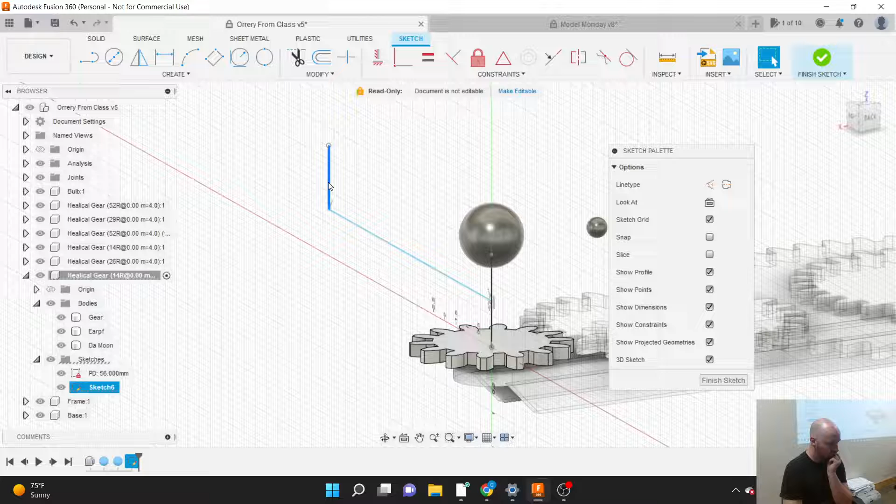And now, if I make a line, it will let me sketch out away from the plane that I was drawing on. So now I can make lines that connect my, oh, look at that, it didn't. Why didn't you? It was just doing it from that perspective. But can I force it to be coincident to? This is what happens when I go off the reservation and I start just doing stuff. Here we go. That's what you gotta do.

So this line is still existing, kind of like on my sketch plane, but you can see it didn't connect my moon here. While I've got my 3D sketch checkbox active, if from the modify menu I choose the move tool, are you following? Kinda? I was trying to backtrack and add an earth and a moon. Oh, okay, cool. All right.

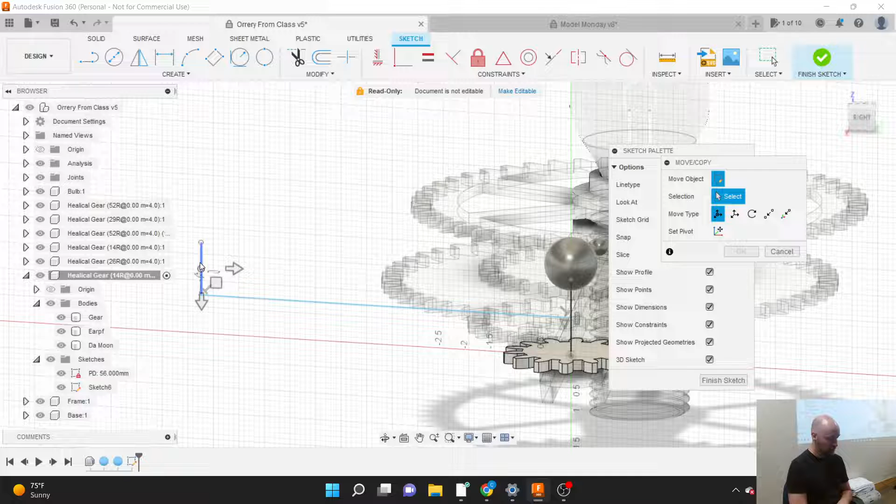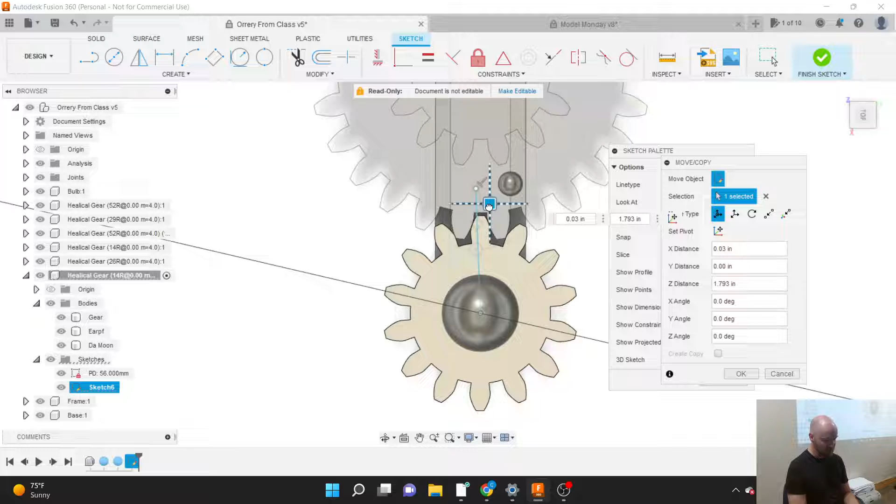So with that 3D sketch checkbox checked here, I can highlight this line, and even though we're editing a sketch, I now have the kind of move tools that I would have in a 3D space. So I can highlight that line and I can just look from the top down and I can move it right over so it's going up inside of my moon there.

And then I can say OK on my move window. And that just goes ahead and it's got that line moved in place there. So 3D sketch is a handy thing to be able to check every once in a while if you don't have a plane that's going to line up right.

I'm going to add, just because I know from experience, the pipe command does not like to make right angles at all. So from the modify menu here, I'm just going to choose to add a fillet. So it's the very top option, modify and then fillet. And I'm going to choose the 2 lines that I want to make a fillet from there, and I'm just going to make like a 1/4 of an inch fillet.

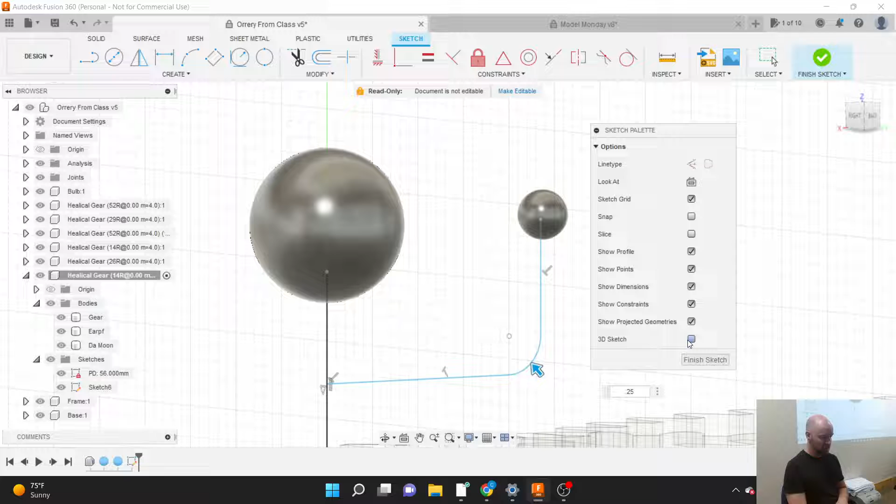Whenever I do a 3D sketch, I always make sure that before I click finish sketch, I'm going to turn off the 3D sketch checkbox. And that is because if you leave the 3D sketch checkbox on, the next sketch you make will be a 3D sketch. And when you select the plane, it can be easy to draw in weird ways. So I just think it's kind of best practice to get into, like, all right, I'm done sketching in 3 dimensions now. Let's go ahead and turn off that sketch checkbox, and then I'll click finish sketch.

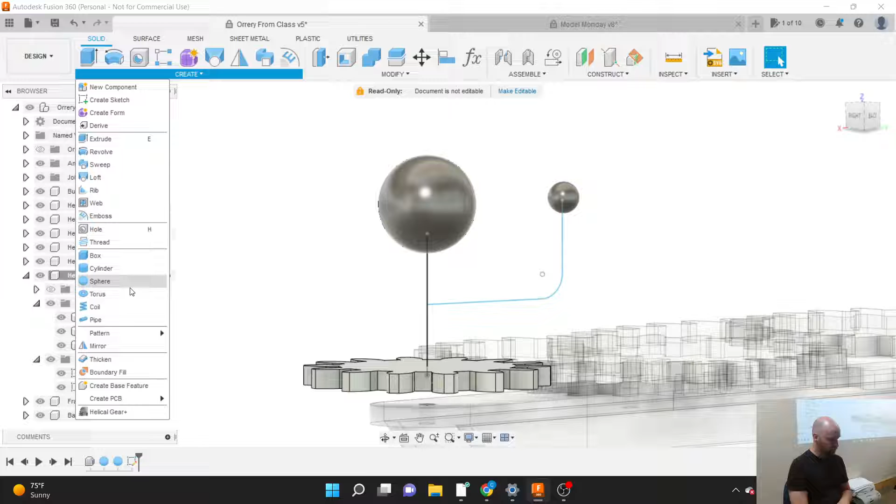All right, so now that we've got our paths made here, the very last thing we need to do is to add our pipe. So from the create menu, I'm just going to go ahead and choose the pipe tool there. I'm going to do this a couple of times, so I'm going to do the pipe tool on that first line that goes up into my earth. I'm going to make this a new body, and the section size is just going to be like 1/8 of an inch. So just a little 1/8 of an inch rod that'll go into my earth to hold it on the gear. Make it a new body, and I'll say OK.

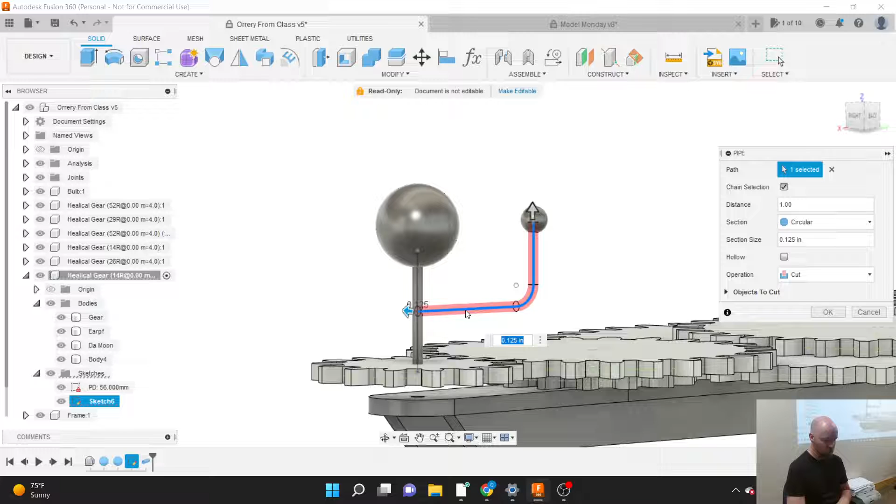And then from the create menu again, I'm going to go ahead and choose the pipe tool one more time. This time I'll pick that curved line that goes over into the moon, and I'm going to make this a new body as well. It remembered that 1/8 of an inch section size there. Honestly, 1/8 of an inch is probably way overkill for holding up these tiny little bodies here.

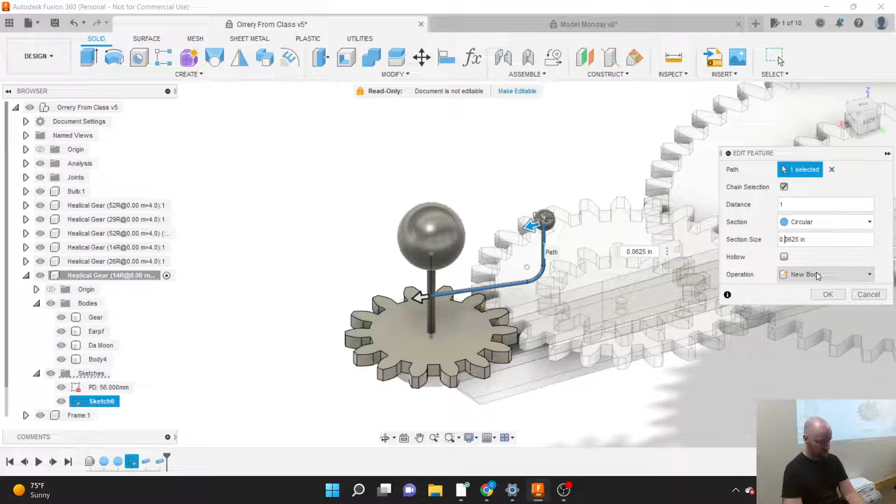But the nice thing about Fusion is it's all parametric, so if later on I come back, that pipe command down here in my timeline where I made this pipe, if I highlight it, you can see that it highlights in my drawing view. If I right click on it I can say edit feature, and then I can go, oh, now it's not 1/8 of an inch, it's 0.0625 inches. It's 1/16 of an inch. And then say okay.

So I'm going to make our main document component my active component again, just so I can kind of zoom out and do a little show off shot here. So we've got all of our joints animated. We've got our mounting screw there, so we could choose to mount this on something, and then you could hang it on your wall, or you could mount it. I thought about mounting it inside of a coffee table, and you can have a nice little Orrery model inside of your coffee table, just rotating around.

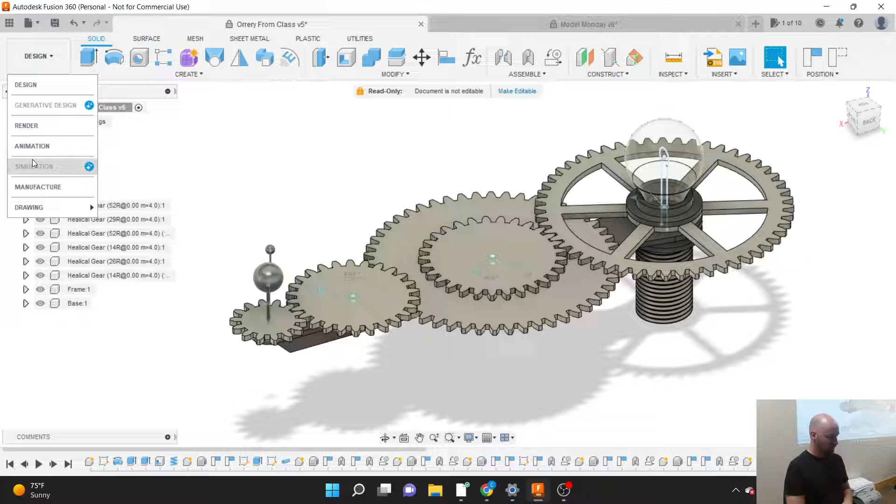We'll do one more class, hopefully, where we talk about tool paths, and we will leave the comfort of our design workspace and enter the dark side of Fusion 360 known as manufacturing. And making tool paths and stuff, contours and pockets and slots. Oh my.